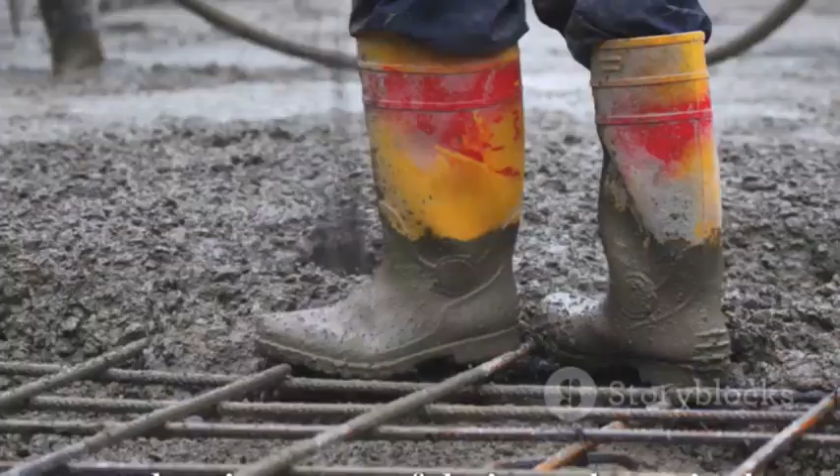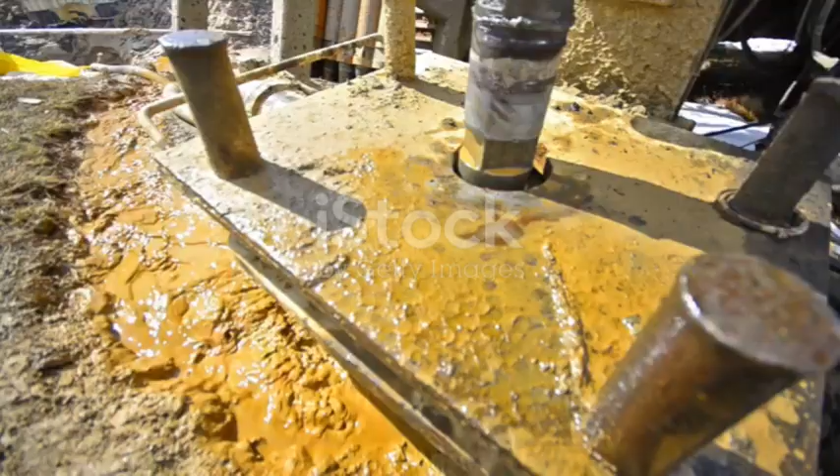Let's talk about dirt, specifically the wet, unstable kind that makes building stuff a real pain. That's where prefabricated vertical drains, or PVDs, come in. Think of them like giant wicks stuck in the ground. They're not glamorous, but they're essential for building on soft soil.

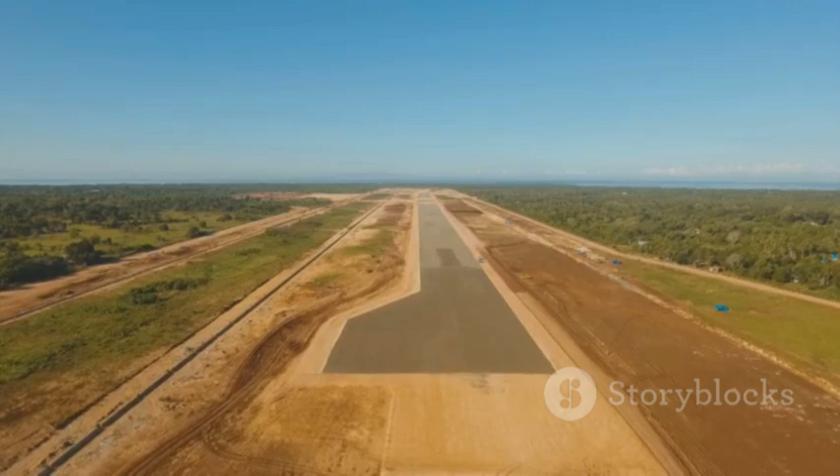Roads, bridges, airports. If it's built on muck, chances are PVDs were involved. They're the unsung heroes of construction, making sure things don't sink into oblivion. These drains aren't just stuck in the ground randomly. There's a science to it, geotechnical engineering. It's about understanding the dirt, how it behaves under pressure, and how to make it stable enough to build on.

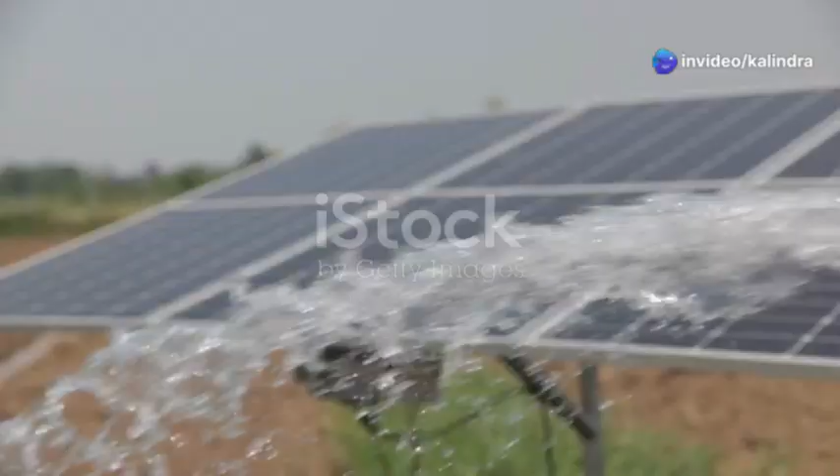And that's where PVDs really shine. They give that soggy soil a way to drain, letting the water out and the ground settle faster. It's like squeezing out a sponge, but on a much larger, more technical scale.

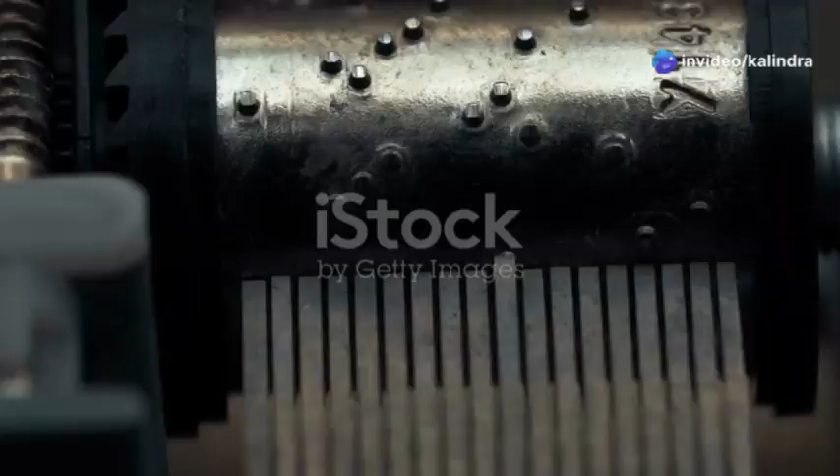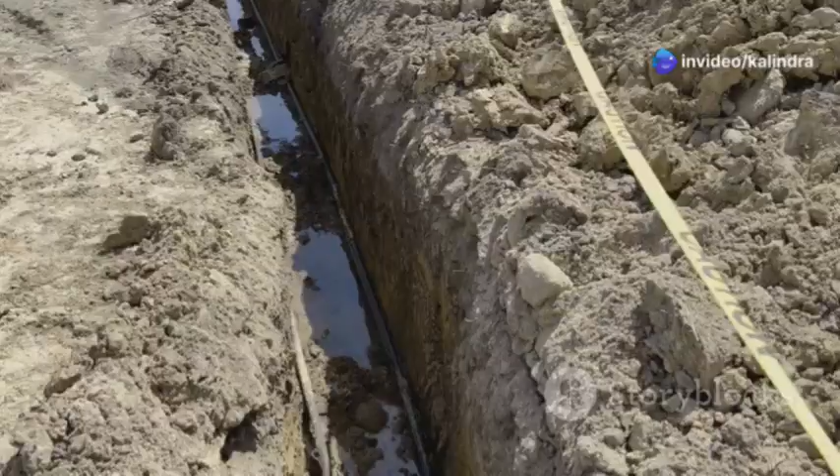Now let's get our hands dirty, literally. PVDs are pretty simple in design, which is part of their beauty. Imagine a plastic straw, but flat and with tiny channels running down its length. That's the core of a PVD. It's usually made of polypropylene, a tough plastic that can handle being buried and squeezed for years.

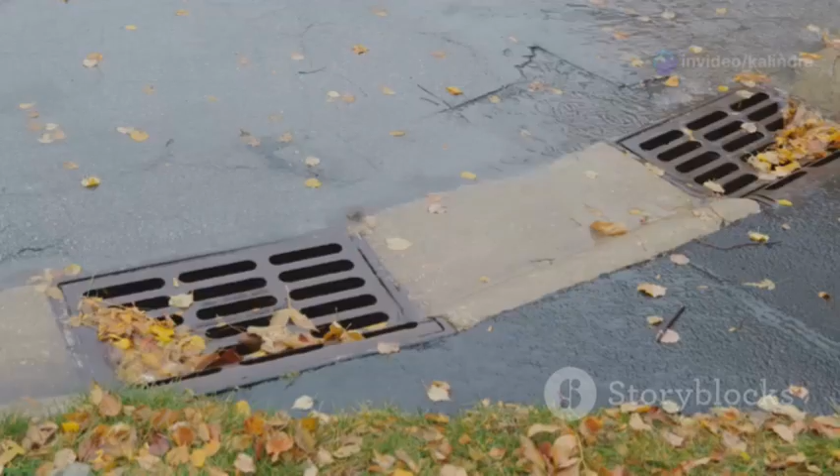Surrounding that core is a filter fabric, like a sock. This fabric is crucial. It keeps the soil out of those tiny drainage channels, preventing clogs. It's like a coffee filter, only instead of coffee grounds, we're keeping muck from gumming up the works. Without that filter, the whole system would be useless.

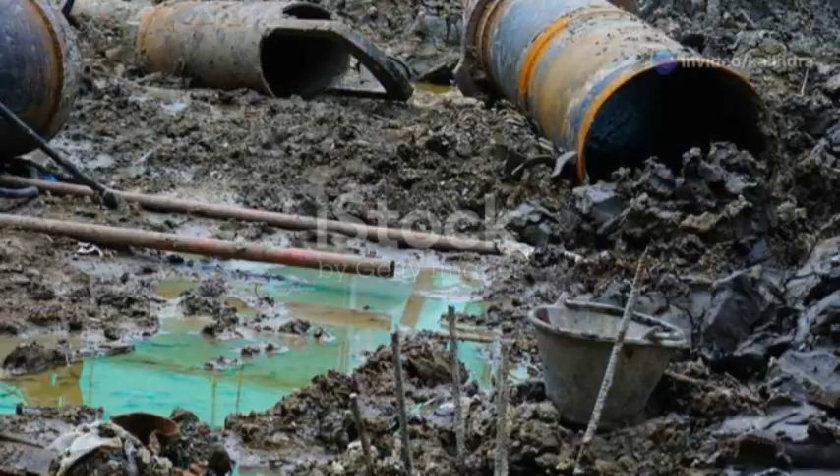The science behind PVDs is all about consolidation. When you put weight on wet soil, the water gets squeezed out and the soil compresses. But that takes time, sometimes decades. PVDs speed up that process dramatically. They act like shortcuts for the water, giving it an easy escape route. This means faster construction and a more stable foundation.

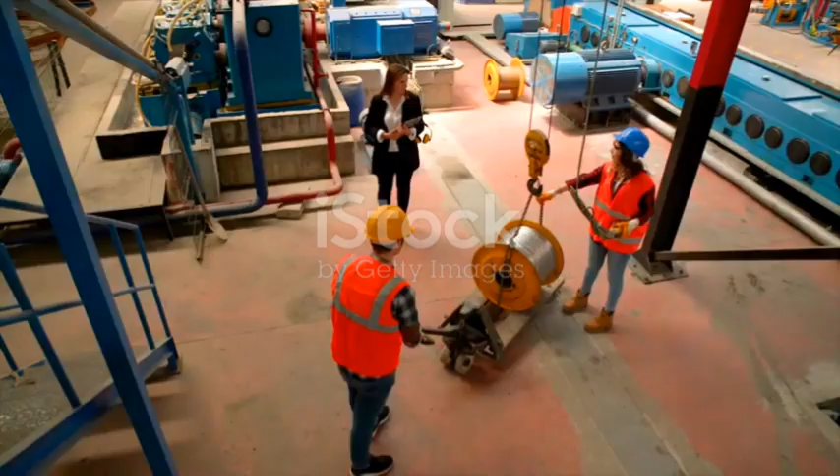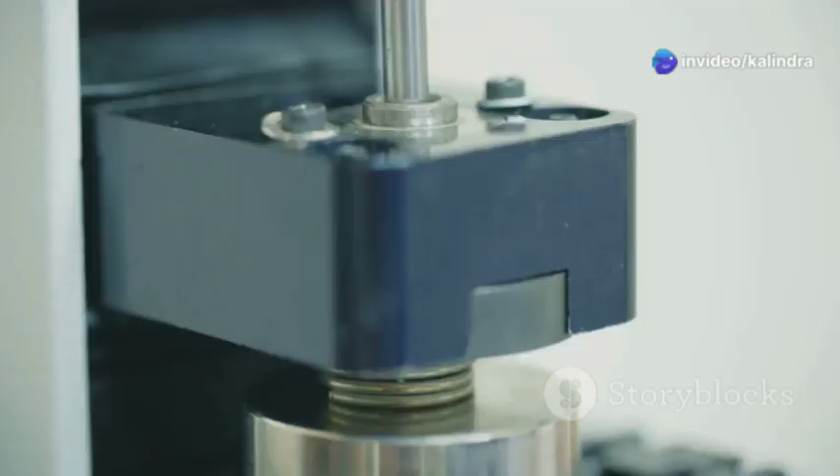Don't let the simplicity fool you. Building these drains is serious business. We're talking high-tech manufacturing to make sure every PVD is tough, efficient, and built to last. It starts with the core, that plastic straw. It needs to be strong enough to withstand the pressure of tons of earth, but flexible enough to bend without breaking during installation. Then there's the filter fabric.

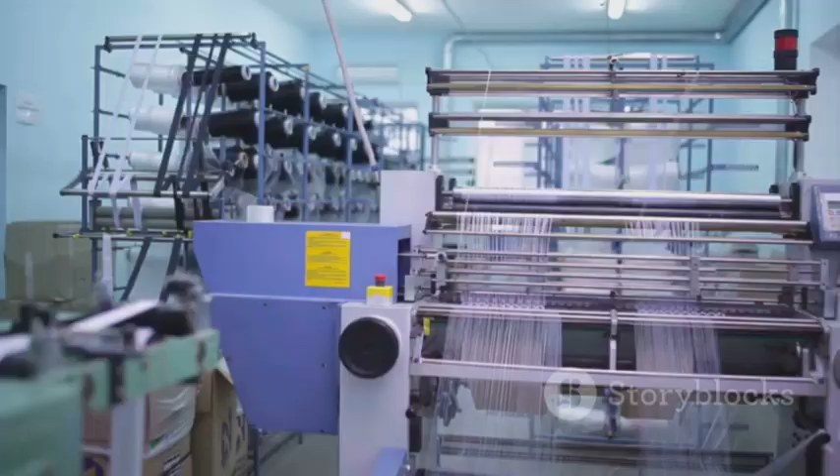This is where things get really technical. The fabric needs to be permeable enough to let water through, but fine enough to keep even the smallest soil particles out. It's a delicate balance, and manufacturers use sophisticated materials and weaving techniques to get it right.

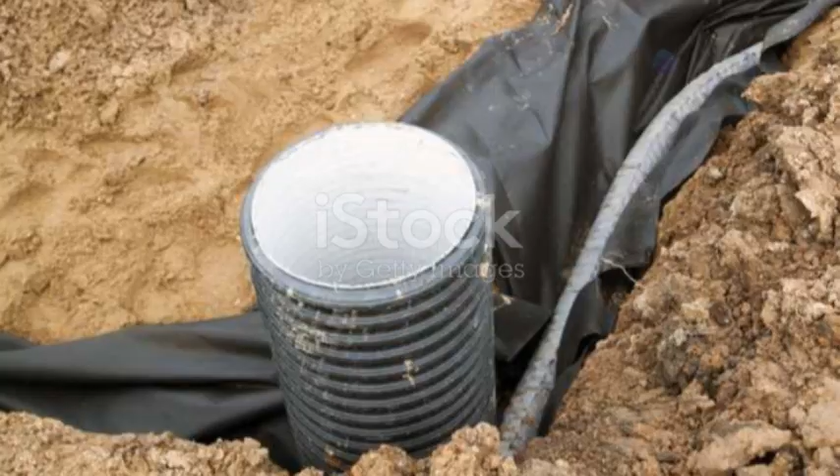But it's not just about the materials. The dimensions of the PVD, the size and spacing of those drainage channels, the type of filter fabric, all of these factors are carefully calculated by engineers. They consider the type of soil, the weight of the structure, and even the local climate to create the perfect PVD for the job.

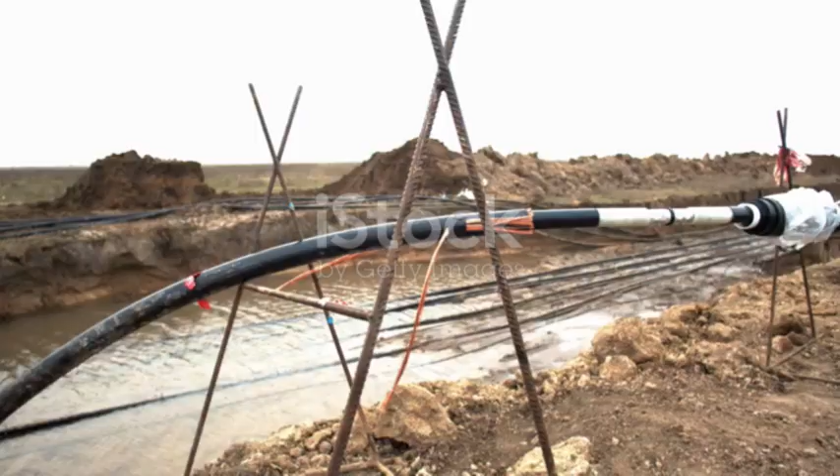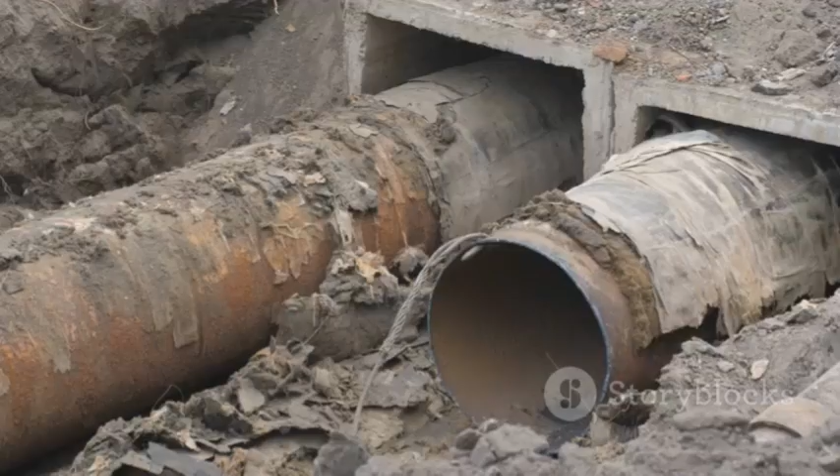Installing PVDs is where the rubber meets the road, or more accurately, where the plastic meets the mud. It's a carefully choreographed dance of heavy machinery and precise movements. First, a specialized rig, basically a giant hydraulic hammer, drives a steel casing into the ground. This casing acts as a guide for the PVD.

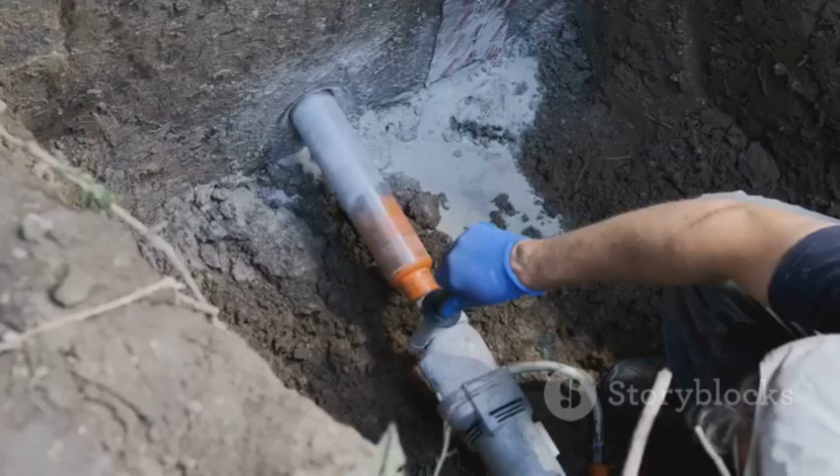Next, the PVD itself, pre-attached to a steel mandrel, is inserted into the casing. The mandrel is like a long, thin sword that protects the PVD during installation. Once the PVD is at the desired depth, the mandrel is retracted, leaving the drain in place. The casing is then pulled out and the process repeats.

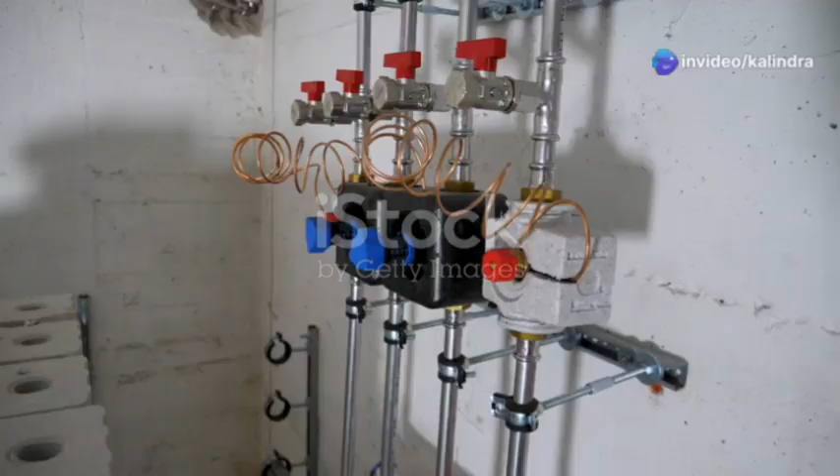The whole operation requires a skilled operator who knows how to handle the equipment and understand the soil conditions. They're constantly adjusting the pressure and angle of the rig to ensure the PVDs are installed correctly. It's a dirty, demanding job, but somebody's got to do it.

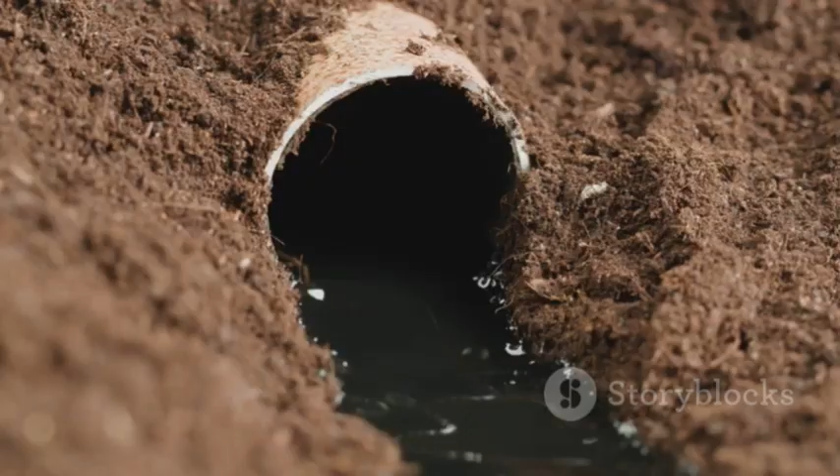Section 5, improving geotechnical performance with PVDs. So we've got these plastic straws in the ground. How exactly do they turn muck into a solid foundation? It's all about speeding up consolidation. Remember, that's the process of water squeezing out of the soil, allowing it to compress and become denser. PVDs act like express lanes for that water, shortening its journey and accelerating the whole process.

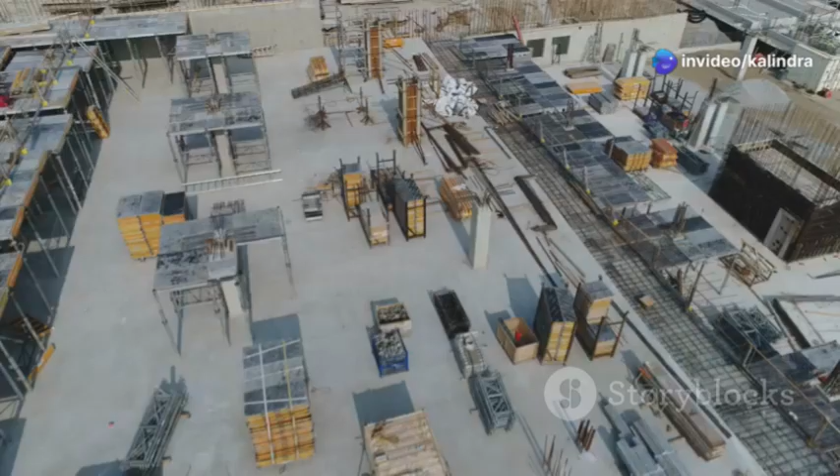Without PVDs, that water would have to slowly seep through the soil, taking years, even decades, for the ground to fully settle. With PVDs, that time can be reduced dramatically, sometimes by as much as 80%. That's a huge time saver, especially in large-scale construction projects where every day counts.

But it's not just about speed. PVDs also improve the soil's strength and stability. By removing the water, they increase the soil's bearing capacity, meaning it can handle heavier loads without sinking. This is crucial for supporting structures like buildings, roads, and bridges.

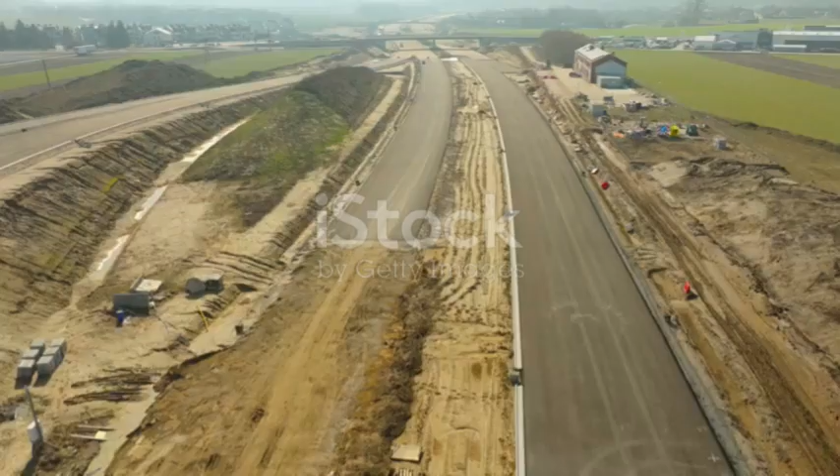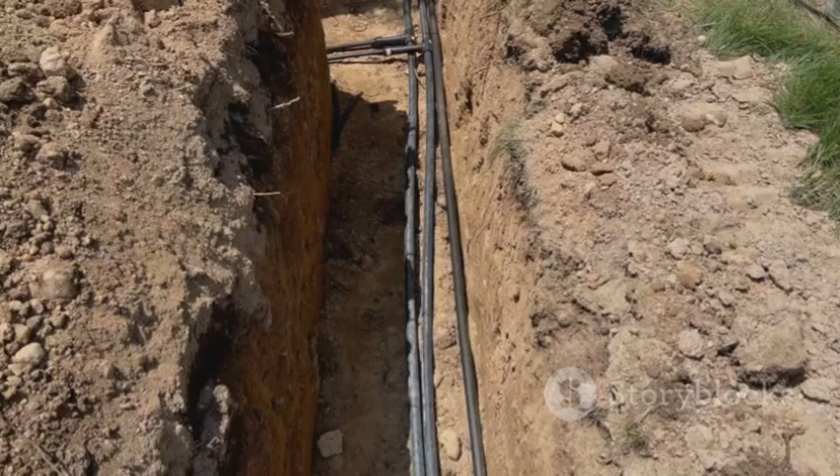Section 6, applications in infrastructure and beyond. PVDs are like the duct tape of geotechnical engineering. They're incredibly versatile and have a wide range of applications. You'll find them in just about every type of infrastructure project built on soft soil. Roads, highways, railways, they all rely on PVDs to provide a stable foundation.

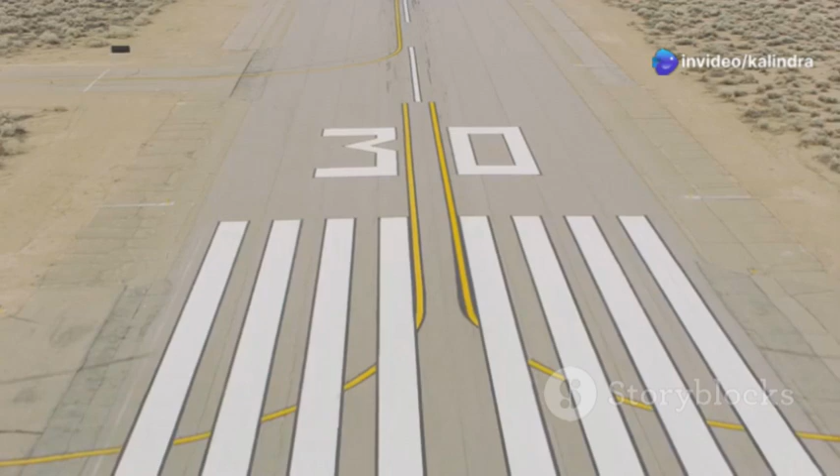Airports are another prime example. Runways need to be incredibly flat and stable to handle the weight of landing aircraft. PVDs are essential for building these runways on soft ground, ensuring the safety of passengers and crew.

But it's not just about traditional infrastructure. PVDs are also used in land reclamation projects, turning swamps and marshes into usable land. They're used in environmental remediation, helping to contain and treat contaminated soil. They're even used in offshore wind farms, providing stability for the massive turbines.

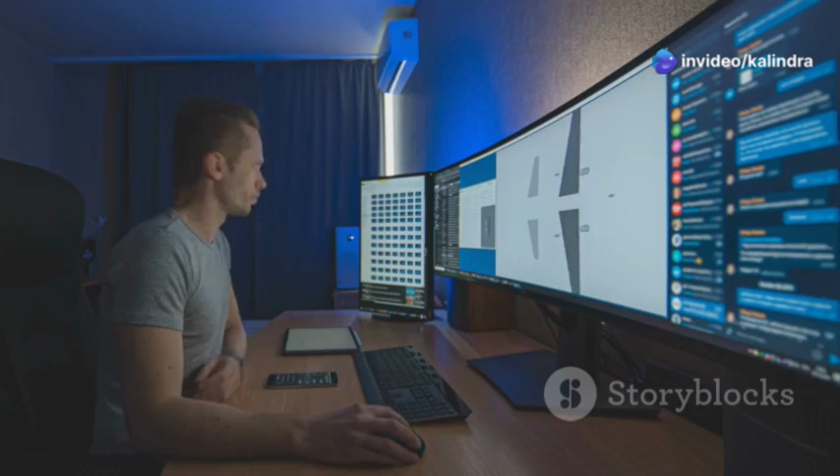Section 7. Design parameters and quality assurance. Designing and installing PVDs is a science, not a guessing game. Geotechnical engineers use sophisticated software and calculations to determine the optimal spacing, depth and type of PVDs for each project. They consider factors like soil properties, expected loads and even the local climate.

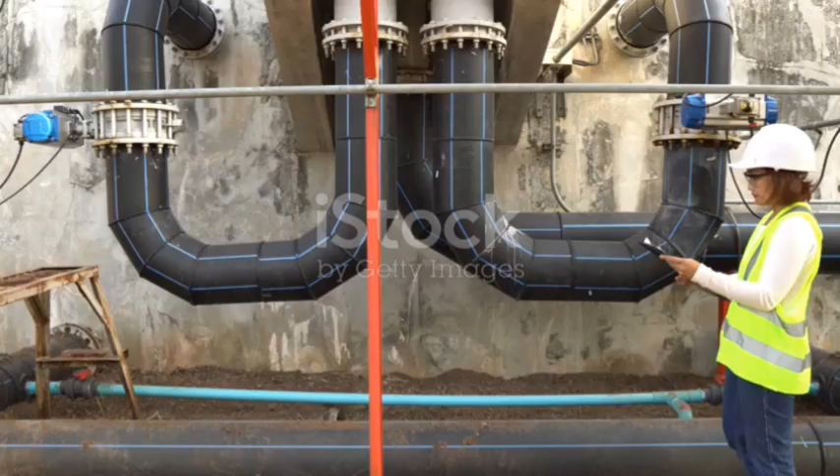Once the design is finalized, it's all about quality control. Engineers monitor the installation process closely to ensure the PVDs are installed according to specifications. They use instruments to measure the depth and alignment of each drain, making sure everything is up to snuff.

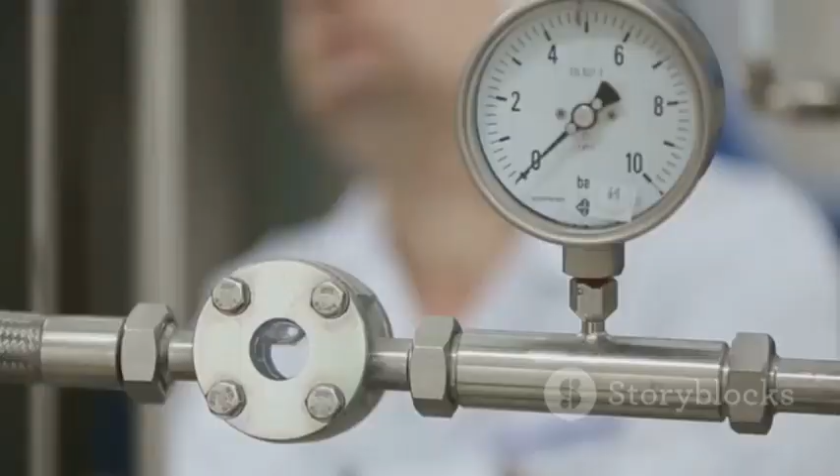They also conduct tests to verify the effectiveness of the PVDs. This might involve measuring the rate of consolidation, monitoring pore water pressure, or conducting load tests. It's all about ensuring those PVDs are doing their job, keeping the ground stable and the project on track.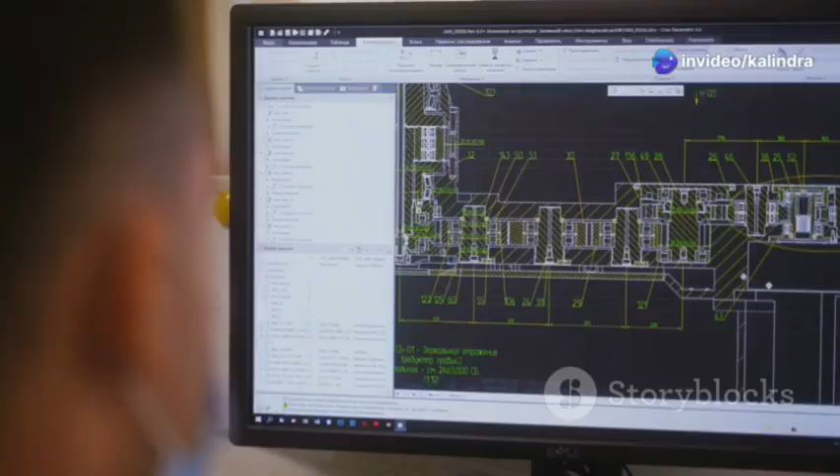Section 8. Numerical modeling and analytical techniques. Remember that sophisticated software I mentioned? It's not just fancy graphics. Geotechnical engineers use numerical modeling techniques to simulate the behavior of soil with and without PVDs. These models help them optimize the design and predict how the ground will behave under different loading conditions.

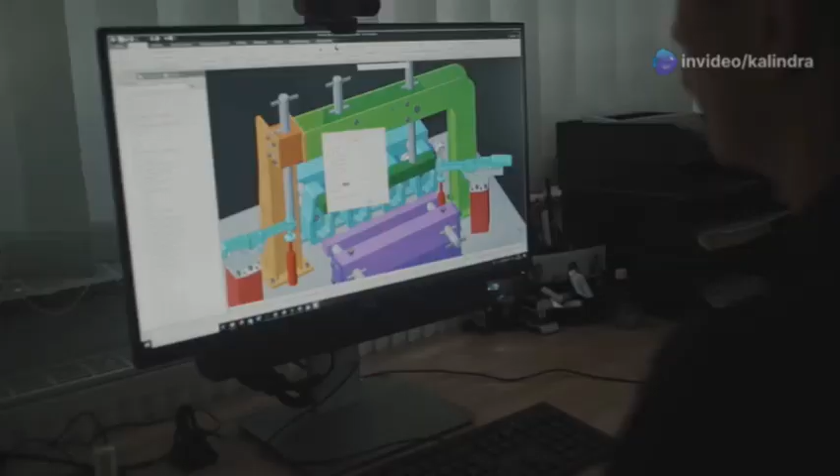One common technique is finite element analysis, which breaks down the soil into tiny elements and calculates the stresses and strains on each element. This allows engineers to identify potential weak spots and adjust the design accordingly. These modeling techniques are constantly evolving, becoming more sophisticated and accurate all the time. This allows engineers to tackle more complex projects and push the boundaries of what's possible with PVDs.

Section 9. Regulatory standards, emerging technologies and benefits. Like everything in construction, PVDs are subject to regulations and standards. These standards ensure the quality of the materials, the safety of the installation process, and the effectiveness of the final product. They provide a framework for engineers and contractors to follow, ensuring consistency and reliability.

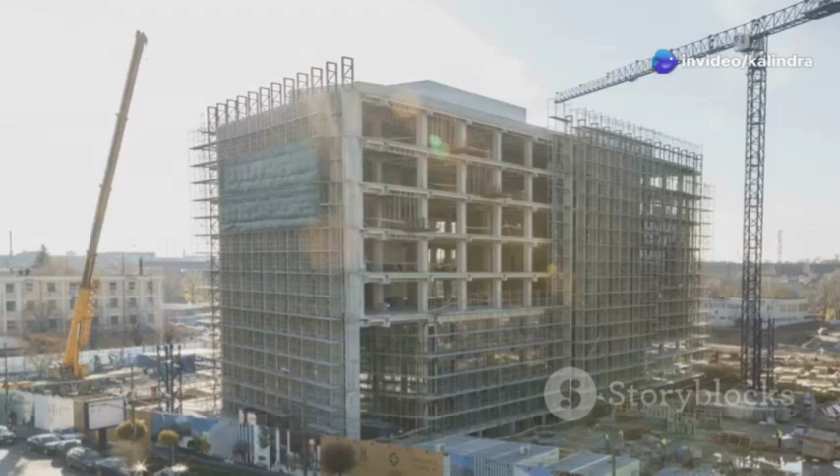But the field is constantly evolving. New materials, installation techniques, and monitoring systems are being developed all the time. For example, some companies are experimenting with biodegradable PVDs made from natural fibers, reducing the environmental impact.

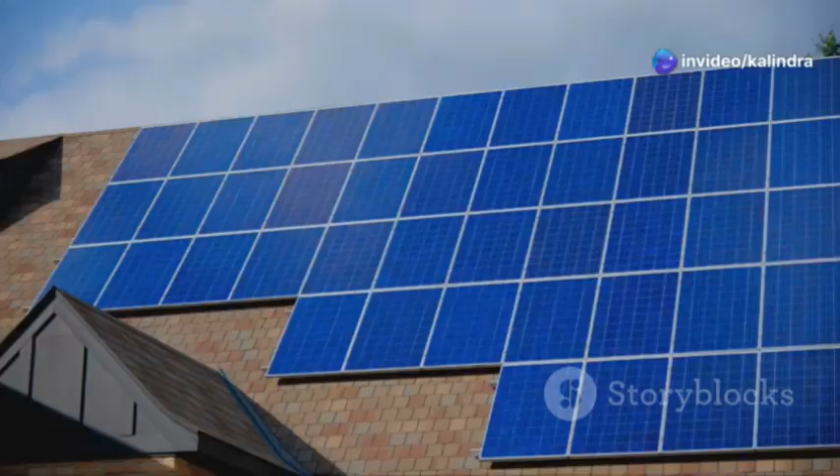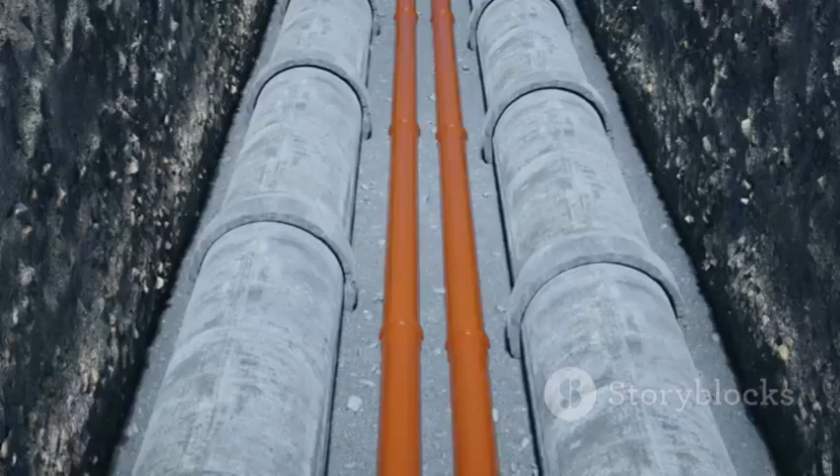And the economic and environmental benefits of PVDs are undeniable. They reduce construction time and costs, minimize excavation and waste, and improve the sustainability of infrastructure projects. So next time you see a construction site, take a moment to appreciate the humble PVD. It might not be glamorous, but it's playing a vital role in shaping our world.